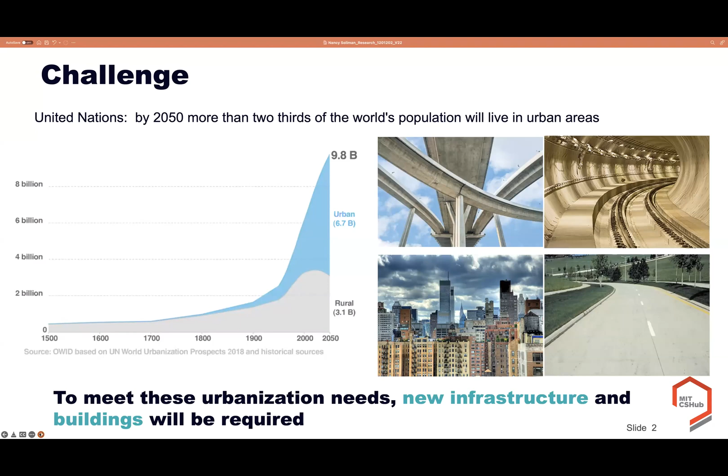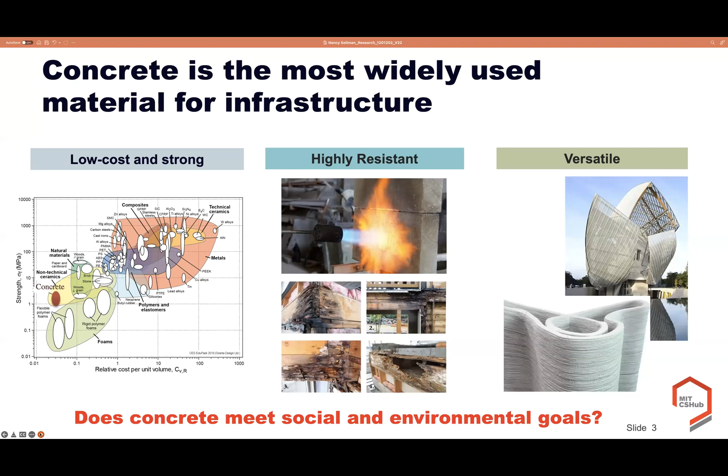But the question here: does concrete meet social and environmental goals? The production of cement can contribute up to 8% of CO2 emissions, and also consumes natural resources and energy. Additionally, the traditional strength-only paradigm for structural design of concrete material is no longer adequate and has shown two main flaws: eco-efficiency issues and durability issues related to deterioration of concrete within a short term.

For example, in the USA, we spend up to $28 billion annually for structural rehabilitation of bridges. The second problem is functionality issues, as traditional concrete cannot resiliently withstand loading conditions or changes in environment, since normal concrete has no negative entropy input through matter or energy with external stimuli such as motion, electrical, or chemical change.

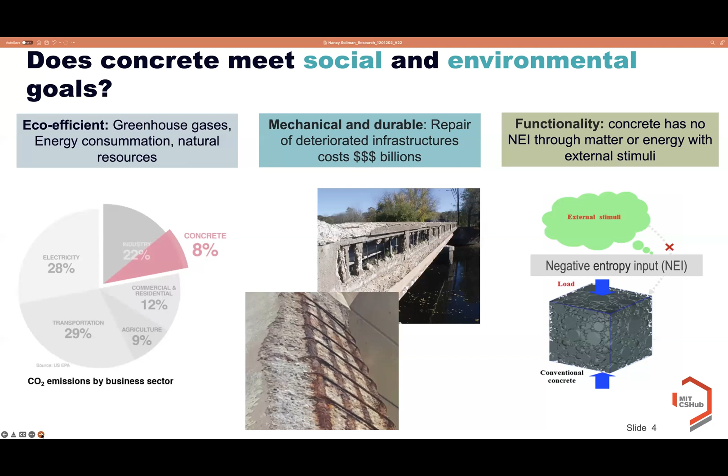So my research question is: how to produce innovative and multifunctional material for sustainable and resilient infrastructure to meet social and environmental goals? My research focuses on five main areas: developing innovative material byproducts using recycled material, functional material, and nanomaterial.

Developing a novel technology to capture and sequester CO2; smart and multifunctional material for structural health monitoring, self-healing, electron conductive and thermal properties; and enhancing mechanical properties and durability of concrete in severe environments by developing ultra-high performance concrete.

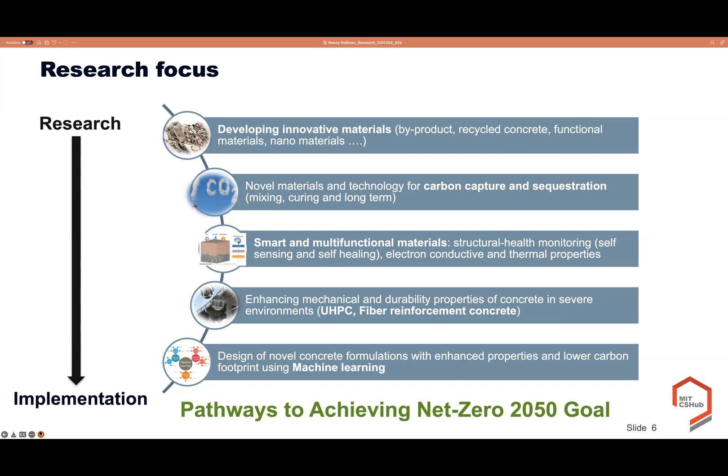Here I will present the development of electron conductive cement-based material using nanocarbon particles through changing the microstructure of cement matrix. When we add nanocarbon black into cement matrix, we develop a novel composite that has electrical conductivity, self-heating, and energy storage capacity.

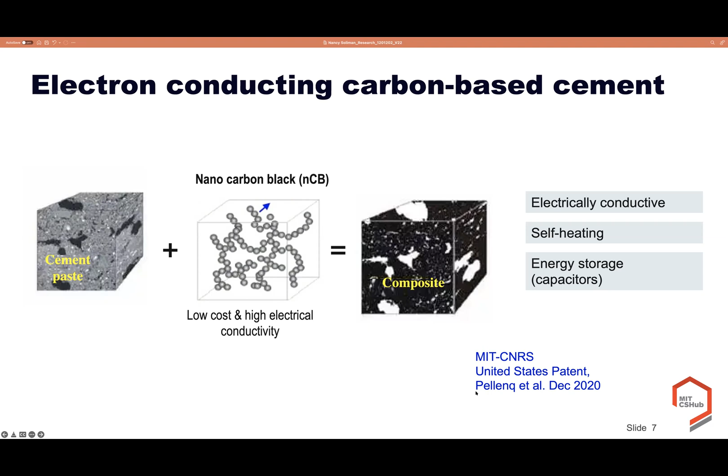This is a patent between MIT and CNRS. But there are some challenges with using nanocarbon black in cement matrix.

The first challenge is dispersion, especially since nanocarbon black is a hydrophobic material while cement is hydrophilic. So how do we disperse nanocarbon black chemically and physically into cement, and what is the effect on mechanical properties and electrical conductivity?

Moving to the second question: how does the mixture proportion and texture of the cement matrix, such as water-cement ratio and nanocarbon black content, affect the measurable electrical conductivity, Joule effect, and electrical conductivity?

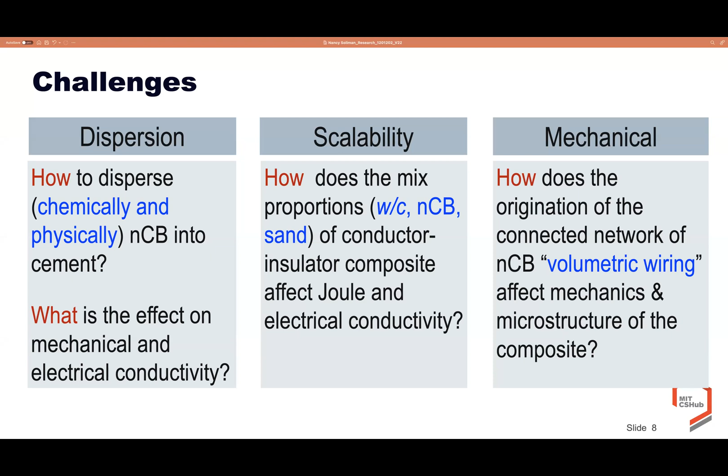The third question, to get the full advantage of the multifunctional material: how does the orientation of the connected network volumetric wiring affect the mechanical properties and microstructure of the composites? Here I will present some results about the effect of chemical dispersion of nanocarbon black particles.

I'll present just a few results. We used several surfactants such as cellulose, polycarboxylate superplasticizer, polynaphthalene, and synergy between both the carboxylate and the cellulose with the polycarboxylate superplasticizer.

Here I will present the effect of polynaphthalene superplasticizer as a dispersant agent in nanocarbon black particles. We use a constant water cement ratio of 0.42 and a constant carbon content of 12.5 percent by volume.

On the x-axis is the volume of the polynaphthalene superplasticizer divided by the constant volume of nanocarbon black. On the left axis is the electrical conductivity, and on the right axis is the compressive strength.

Obviously, when we don't have any dispersion, we found that the compressive strength of the material is reduced compared to the reference, while we have achieved good electrical conductivity. With adding more polynaphthalene superplasticizer, we found a slight enhancement in strength and a slight enhancement in electrical conductivity.

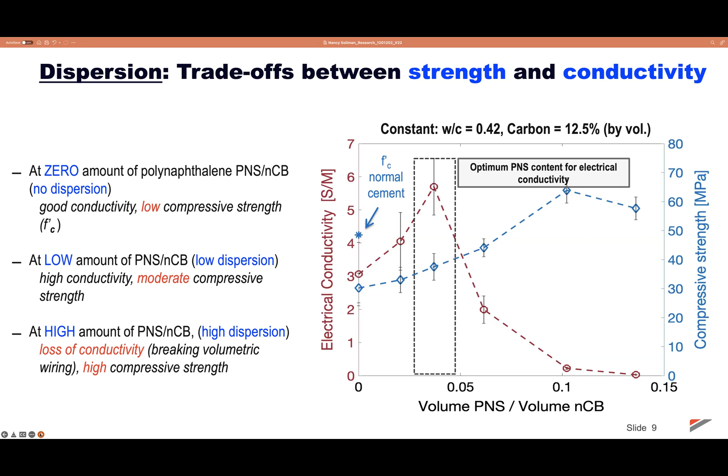Moving now to the second question about scalability. This slide shows the link between measurable electrical conductivity and the texture of highly heterogeneous conductor-insulator material.

These pastes and mortars were prepared using two different water cement ratios, 0.42 and 0.6, and two different mortars, with the weight of sand to the weight of cement at 1:1 and 2:1.

This figure shows the tortuosity-based model performance, showing a normalized electrical conductivity, measured electrical conductivity normalized to the electrical conductivity of pure nanocarbon black, versus nanocarbon black volume fraction, and modeling for all the samples considered. The inset of the model shows the performance in log scale.

It can be observed that the electrical conductivity of all cement-based pastes and mortars collapses into one curve, which concludes that the conductivity isn't affected by water cement ratio or sand content. The main parameter that affects conductivity here is the carbon black, the volume fraction of carbon black.

Also, the electrical conductivity versus nanocarbon black volume fraction follows the typical feature of percolation phenomena. This can be illustrated at 4%, which is the percolation threshold, where the conductivity increases by an order of magnitude.

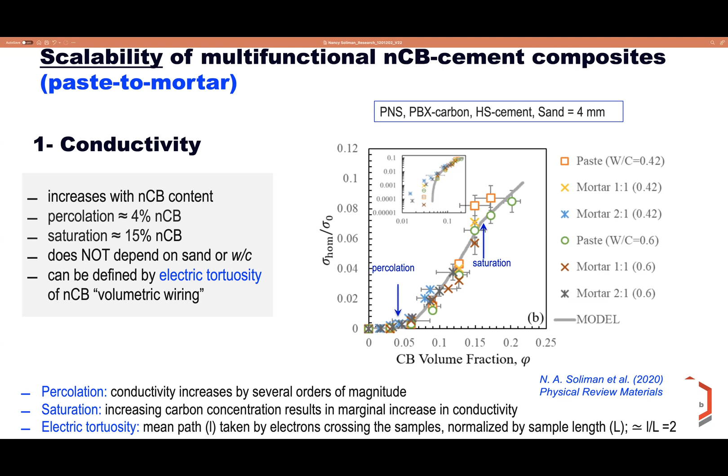We found that fine-tuning the volume of carbon can reach a tortuosity value of 2. This means the path of the electron takes only twice the length of the sample, and this is very important when designing electrical conductivity at engineering scales.

One of the most attractive applications of electrical conductivity is resistive heating capacity. Here we establish a fantastic relation between resistive heating capacity and volume fraction of nanocarbon black for different pastes and mortars produced with various water cement ratios and sand content.

What we observed is that the Joule effect increases with addition of nanocarbon black while it's reduced with sand addition. This relation is very important when designing material with resistive heating capacity, as the two quantities we should know when designing our material are how much carbon should be added, and how much this effect is diluted by the addition of sand.

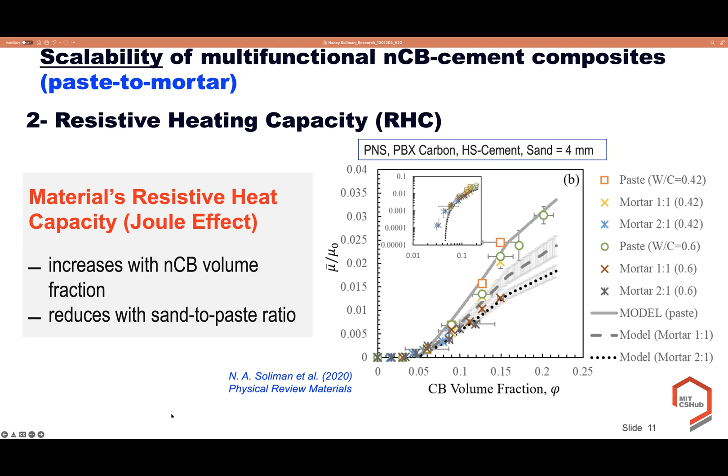Moving now to the third question about the effect of nanocarbon black on mechanical and microstructural properties, using a multi-scale engineering approach that we developed here at MIT.

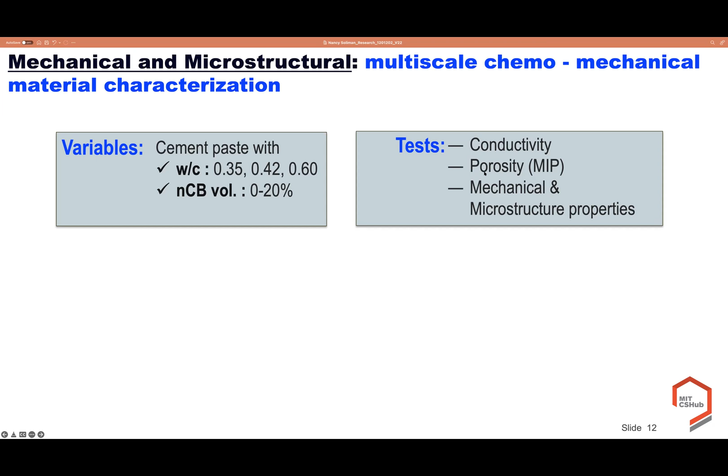We use different water cement ratios going from 0.35 to 0.6 and different nanocarbon black volume fractions from 0 to 20%, and we measure the conductivity, porosity, and the mechanical and microstructural properties.

By linking the macroscale to the microscale to the nanoscale, we get a full comprehension of the effect of nanocarbon black on the cement matrix. At macroscale we measure compressive strength, while at microscale we measure hardness and indentation modulus using micro indentation tests, and fracture toughness using micro scratching tests.

Moving to the nanoscale, we measure the hardness and indentation modulus for low density CSH and high density CSH, the main constituent of the bonding agent in cement matrix. From the relation between hardness and compressive strength, we can estimate the cohesion and the friction coefficient, the two parameters that define the strength of the material. From fracture toughness and hardness, we can estimate the fracture process zone, and from indentation modulus and fracture toughness, we can estimate the fracture energy. Using the micromechanics model, we can estimate the packing density of CSH.

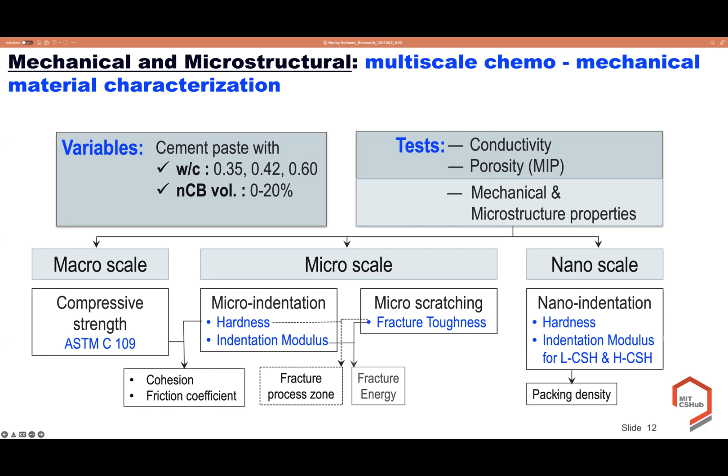Here I am moving to present the effect of nanocarbon black on mechanical properties at the macroscale. What we observed here is for three different water cement ratios: 0.35 with the red line, 0.42 with the blue, and 0.6 with the black.

What we observed here is that the addition of nanocarbon black volume fractions leads to a big reduction in the compressive strength. The second message is that the reduction of compressive strength at low water cement ratio is higher than at high water cement ratio. For example, at 15% nanocarbon black volume fraction, the reduction in strength at water cement ratio 0.6 is about 25%, while the reduction in compressive strength for water cement ratio 0.35 was up to 60%.

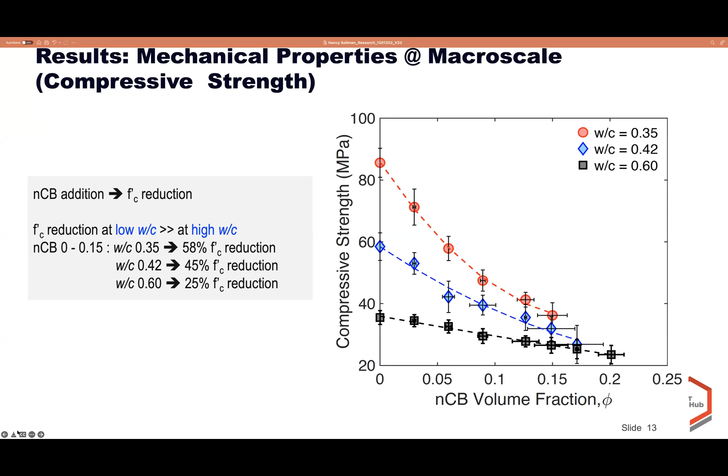Moving now to the effect of nanocarbon black on fracture properties. The fracture property here is the material property that describes the ability of the material to withstand the presence of a crack. It is a very important parameter as it represents the quality of the binder. By using the linear elastic fracture mechanics method developed by Ulm and co-workers, we evaluate the energy release of the system, which represents the fracture toughness and the fracture energy. This slide shows three different water cement ratios, from 0.35 to 0.6.

What we observed here is that the addition of nanocarbon black leads to enhanced fracture toughness of the material, whatever the water cement ratio. This enhancement in fracture toughness originates from crack deflection. This means the crack doesn't go through the nanocarbon black inclusion, it goes around and above, requiring more energy to open the crack. So the nanocarbon black is considered an obstacle in front of the crack.

To confirm our result, we used the scanning electron microscope, where we observed the fracture mechanism image of the scratch groove in the mixture prepared with water cement ratio 0.6 and nanocarbon black 15%. What we observed under the scanning electron microscope is that the tortuosity and non-planar geometry of the crack were clearly visible on the crack surface, which proves that this enhancement of fracture toughness results from crack deflection.

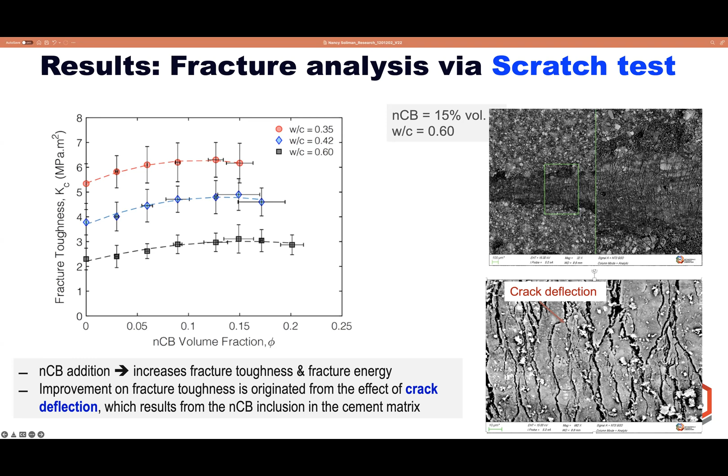Moving now to see the effect of nanocarbon black on the ductility of cement matrix. To quantify the ductility, we measure the ratio between indentation modulus over indentation hardness as a function of nanocarbon black, shown in the left figure. We also measure the fracture process zone, which equals the fracture toughness divided by the hardness, which considers the far field stress in our test, squared.

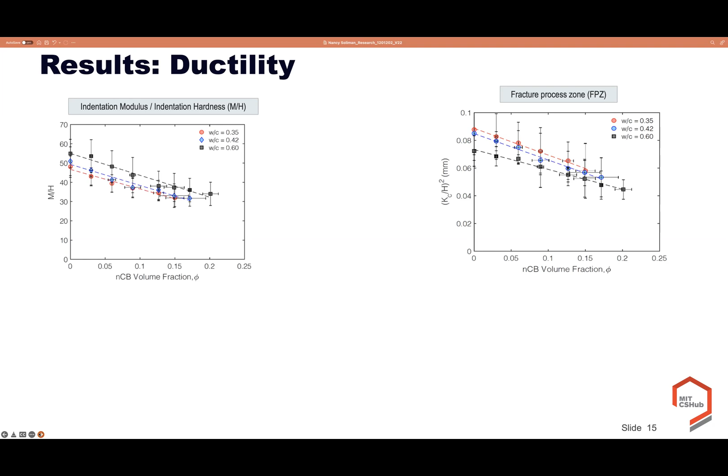The fracture process zone represents the ductility: if the fracture process zone is large, it means the material is ductile, while if it is too small, it means the material is brittle. What we observed here is that the addition of nanocarbon black leads to a reduction in the ductility of the material, whether measured by the indentation modulus over indentation hardness or by the fracture process zone.

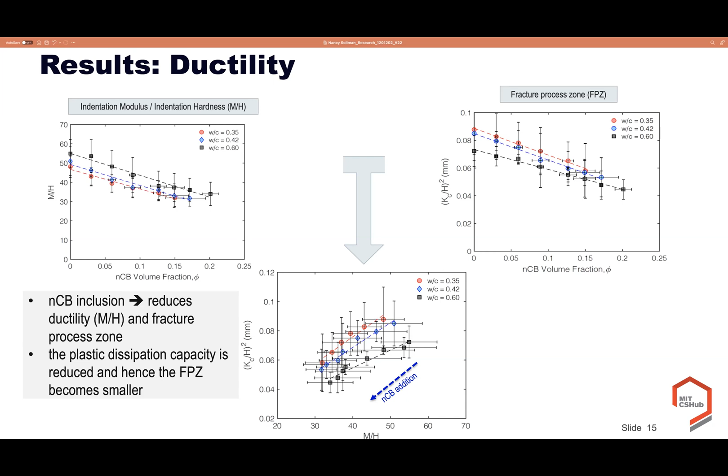Here we can say that the plastic dissipation capacity represents a reduction of the ductility when adding nanocarbon black. So this is a discussion question we asked ourselves: why does nanocarbon black addition lead to an increase in fracture toughness, while leading to a decrease in compressive strength at microscale, and a decrease in the ductility of the material?

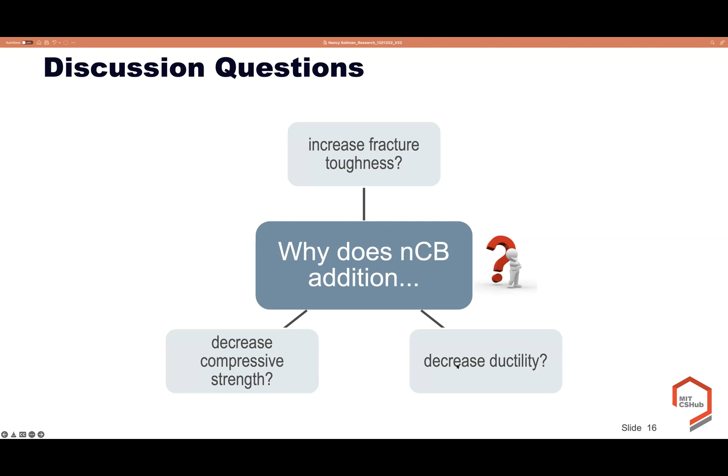This is why we're moving to studying the friction and the cohesion of the material, the two parameters that define the strength. The friction is estimated as a function between compressive strength at microscale and hardness at microscale, while the cohesion is estimated as a function between compressive strength and the friction coefficient.

What we observed here is that the addition of nanocarbon black, for the three different water cement ratios, leads to an enhancement of the friction coefficient of the material. This friction coefficient enhancement resulted from filling the capillary pores with nanocarbon black particles.

We also observed that there isn't any difference between the two water cement ratios, 0.35 and 0.42. This is confirmed because the 0.35 is less than the stoichiometric level, so there is no more pore space to accommodate nanocarbon black particles. This proves that the enhancement of the friction coefficient results from filling the capillary pores with nanocarbon black particles.

We see a de-cohesion of the matrix when adding the nanocarbon black particles, and the friction enhancement is not large enough to compensate for this de-cohesion, so the de-cohesion becomes dominant.

Now we answer the last three questions. Why is the compressive strength reduced? This is due to the de-cohesion. Why is the ductility reduced? This is also due to the de-cohesion, as the sole energy dissipated in plastic deformation comes from the de-cohesion. Friction doesn't dissipate any energy.

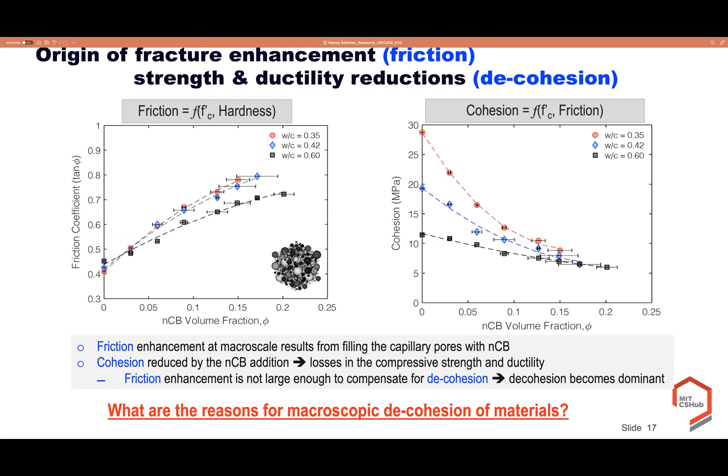To answer this question, we studied the effect of nanocarbon black on the pore size distribution and porosity of the material. What we observed is that there is no impact: the addition of nanocarbon black doesn't affect the pore volume distribution, the total, or the cumulative porosity, for pores greater than 50 nanometers, which is the limitation of mercury intrusion porosimetry.

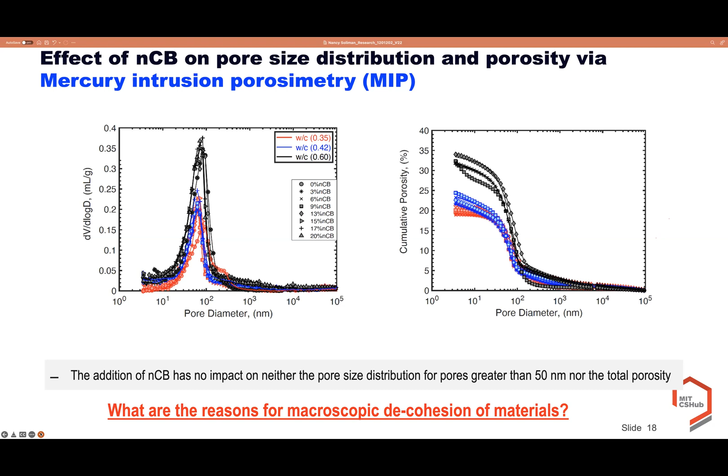So now we need to understand what is the reason for the microscopic de-cohesion. This is why we are going to study the effect of nanocarbon black at the nanoscale, where we show the effect of the packing density.

This slide shows the effect of packing density versus indentation modulus on the left hand side and hardness on the right hand side. The packing density is a very important parameter as it represents the nanoscale porosity of low density CSH and high density CSH, the main constituent of the bonding agent.

We can conclude from this relation that the addition of nanocarbon black leads to a reduction in indentation hardness and indentation modulus. This reduction resulted from the reduction in packing density, which in turn resulted from the repulsive interaction force that developed between hydrophilic calcium silicate hydrate and the hydrophobic nanocarbon black phases.

This macroscopic de-cohesion resulted from the reduction in calcium silicate hydrate at the nanoscale. This shows an EDS for the electron conductive cement, which shows that the carbon intermixes very well with the CSH, but the reason for the de-cohesion problem is the loosening of the packing density.

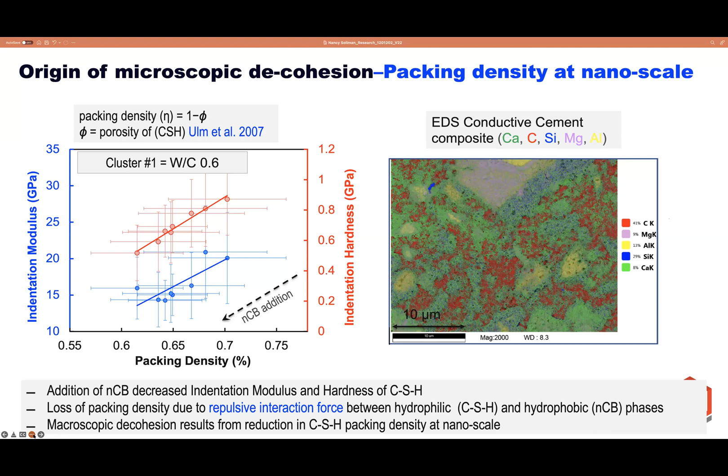From this, we can conclude this presentation: dispersion can lead to multi-scale optimization of nanocarbon black. At low dispersion, we can achieve a multifunctional material with high conductivity and normal strength. While at high dispersion, we can break the conductivity between nanocarbon black particles, but we can obtain high strength materials.

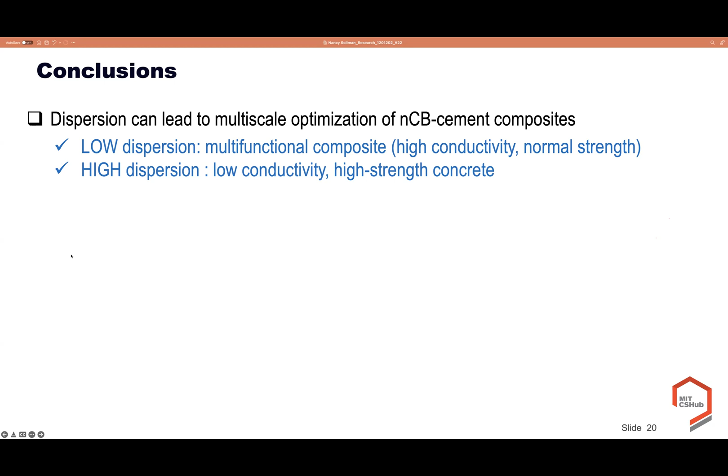Also, it is possible to upscale conductivity and resistive heating from the paste to the mortar. What we observed is that electrical conductivity and resistive heating of the material increase with increasing nanocarbon black content. Electrical conductivity does not depend on water cement ratio, sand content, or any other material.

And the sand inclusion dilutes the Joule effect. The fantastic conclusion from the multi-scale engineering approach linking between the micro scales gives us the full comprehension of the effect of the material. We figured out that the addition of nanocarbon black leads to two phenomena: friction enhancement at micro scale due to the presence of nanocarbon black at larger pores, and this friction enhancement resulted in the enhancement of the fracture toughness of the material.

While the addition of nanocarbon black leads to de-cohesion at nanoscale, and this de-cohesion of the material results from a reduction of packing density of calcium silicate hydrate at nanoscale. This de-cohesion is the reason for reducing the compressive strength at microscale and reduction in the ductility.

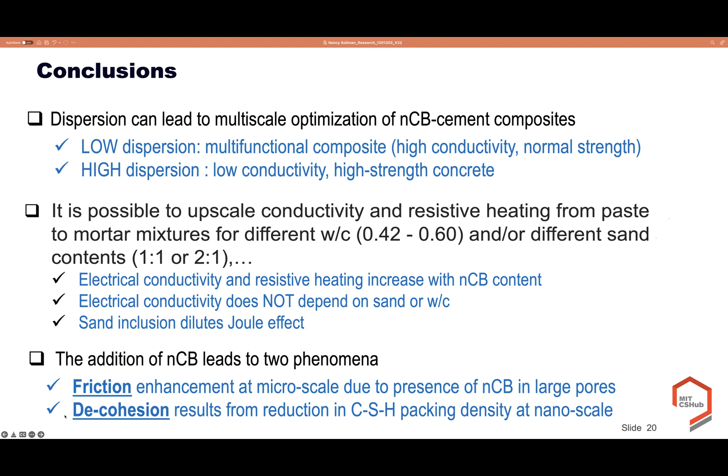So what is the application of nanocarbon black? By application of nanocarbon black, we can use it for de-icing pavement without any road salt, which has a very bad impact on contaminated water and concrete deterioration. We're also saving $1 million of repair and operation costs, and we save a lot of injuries caused by snow. So thank you so much.

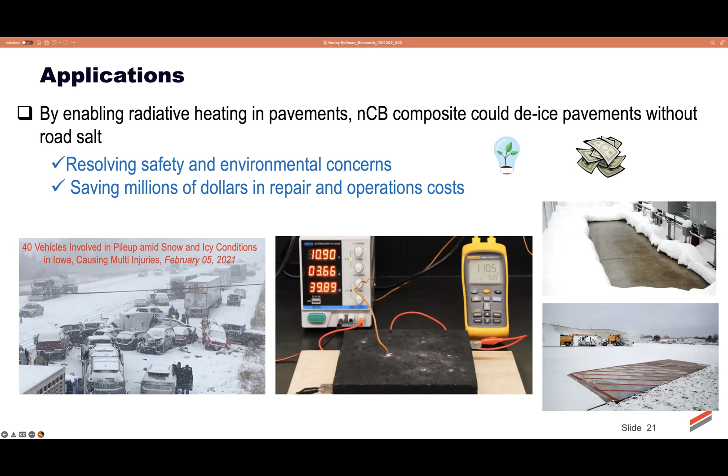So any questions? Yeah, Ahmed, I think you're muted. I believe Ahmed, yeah. So if anyone has any question, I'm gonna ask myself, or can Professor Julie? No, I have actually typed a question. So should I ask it? Yeah, sure, go ahead.

Okay, Nancy, it's a very nice presentation, no doubt about it, very nice work. What I was asking: to get this percolation threshold with nanocarbon black, do you think you will require a much higher dosage to achieve the desirable multifunctionality you are looking for, as opposed to affecting the other properties of the concrete? Because your percolation threshold you mentioned is about 4% or something. Can you explain this 4%?

Yeah, so actually the percolation threshold at 4% is very low compared to material that doesn't have any nanocarbon black or aspect ratio, but unfortunately we lose the strength at macroscale to have the full advantage of multifunctional material. Now we understand that the reduction in strength is due to the de-cohesion of the material, and by that we can add some bonding agent or functionality to the carbon black particle, which enhances the bonding between nanocarbon black and the matrix without losing the connection between the particles.

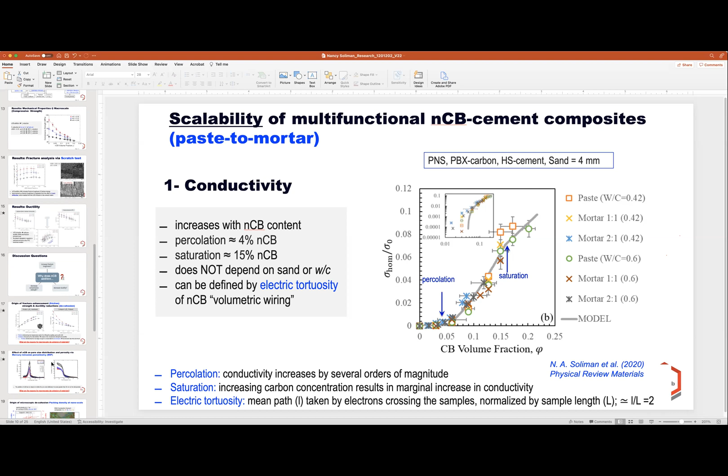Yeah, that's what I was asking, okay. On your slide 18, it wasn't clear, have you mentioned that you don't have any effect on the porosity distribution? Yeah, I think nanocarbon black doesn't have an effect on porosity for each family. For example, for water cement ratio 0.6, we don't see any significant impact in the reduction of porosity, so the porosity is from 30 to 34. This confirms that the reduction or de-cohesion in the matrix comes from the nanoscale.

I see, interesting, thanks a lot. Thank you so much, great. So I can combine two questions into one.

Why nanocarbon black, and also what's the corrosion challenge in the long term? Why nanocarbon black? Nanocarbon black is the cheapest material compared to carbon nanotube, steel fiber, or carbon fiber. But what is the effect on corrosion? Actually, we don't know exactly what the effect on corrosion is, as it's still at the beginning of the research, so I don't have the accurate answer for that.